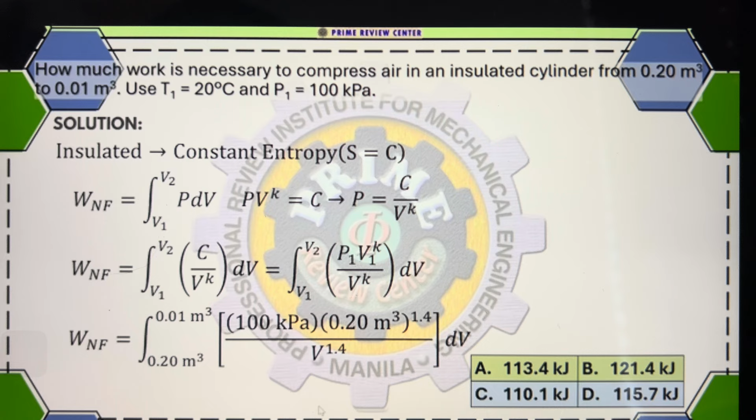So, sa problem, given ka ng V1 tsaka V2, yung ating P1 is also given, that's 100. V1 is also given, that's 0.2. So, we simply substitute lahat ng given sa problem natin. From that, sa calculator, you can simply integrate yung ating work non-flow. So, that will be 100 kilopascal. By the way, yung kilopascal times cubic meter is basically kilojoule. So, ibig sabihin, our final answer is also kilojoule.

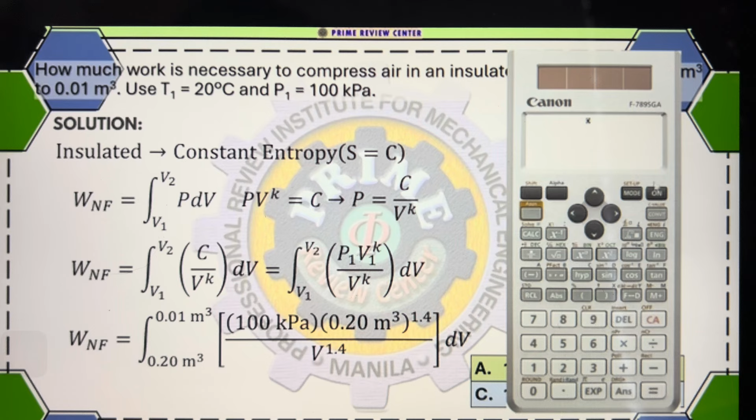And so, whether you use formula or you use this type of integration, you can actually solve the problem. Sige, so pag pinindot nyo na equals, antayin nyo lang yung calculator, makukuha natin yung answer. And by the way, since this is compression, we expect na makakuha tayo ng negative value. So makukuha natin that is negative 115.7 or approximately negative 116. So from the choices, yun yung letter D natin.

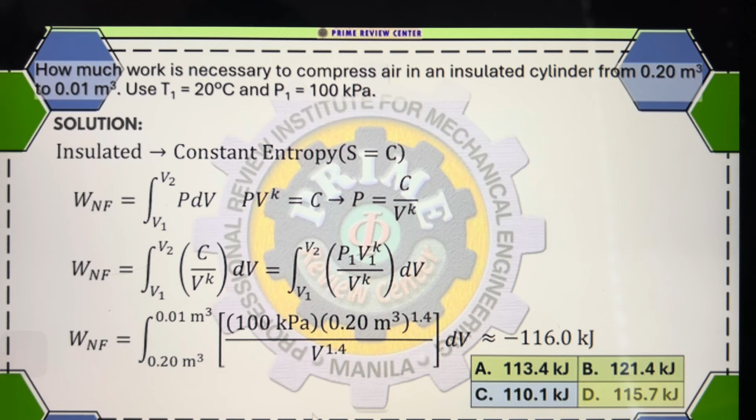And so another problem regarding our refresher. So, basahin ko lang. A heat engine is operated between temperature limits of 1370 degrees Celsius and 260 degrees Celsius. The engine is supplied with 14,142 kilojoule per kilowatt hour. So, find the Carnot cycle efficiency in percent.

So, sa lahat ng mga problem sa power industrial plant, pag Carnot cycle efficiency ang hinahanap at given tayo ng temperature, maalala natin yung formula kasi pag may temperature ka, mabilis lang masolve yung efficiency ni Carnot. So basically, Carnot cycle efficiency given ang temperature is simply 1 minus TL over TH. From the problem, given tayo ng temperature na low tsaka high. So yung low yung mababa, yung high yung mataas.

But take note, in using this formula, we need to have yung absolute temperature. So meaning, yung T-low should be naka-absolute, so plus 273. Same way yung sa T-high na 1370, gagawing absolute, so plus 273. So magiging ganyan yung equation natin. From this, we will solve yung ating efficiency ni Carnot.

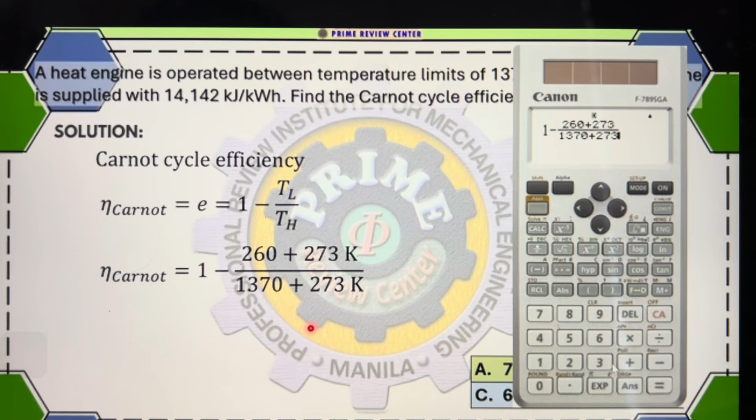Okay? So our point here is, kapag efficiency ng Carnot lang hinahanap, una nyong tignan sa given ay yung temperature. Kung given ang dalawang temperature, most likely, ang pag-solve ng Carnot cycle efficiency ay 1 minus TL over TH lang. So yung Kelvin will cancel out and we are left with a dimensionless value. Para maging decimal, press nyo lang yung S to D, fraction to decimal. So that is equivalent to 0.6756 or rather 67.56%. So yun yung letter C.

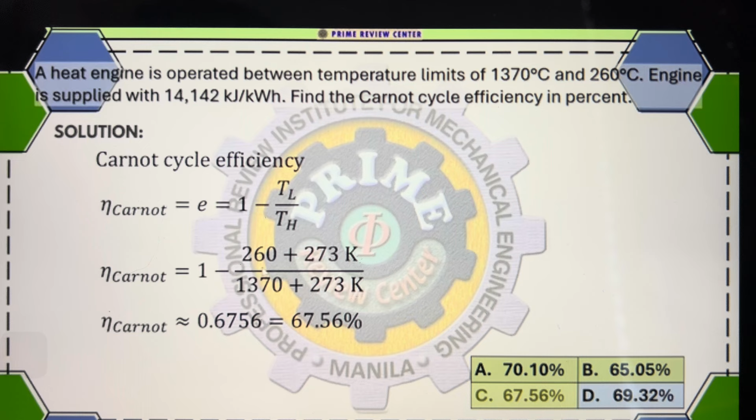Sige, so another problem, ating refresher. So a closed vessel contains air at a pressure of 160 kN per square meter gauge and temperature of 30 degrees Celsius. The air is heated at constant volume to 60 degrees Celsius with atmospheric pressure of 759 mm of mercury. Find the final gauge pressure. So naghanap lang ng gauge pressure.

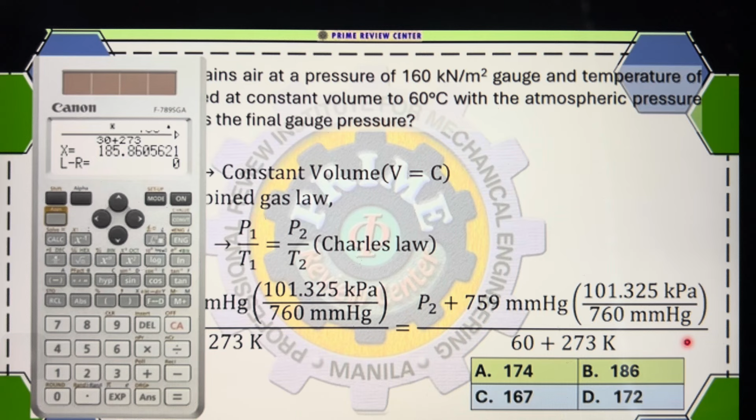Kasi makuha natin is 185.86, and that is basically yung ating answer. That is yung letter B natin.